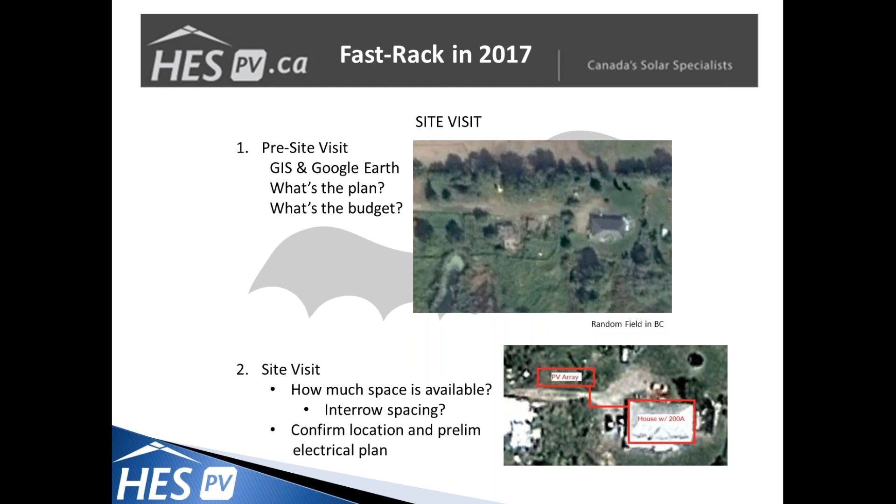So after the site visit is completed and you and your customer have agreed on the size of the system you're looking for, next is our online component generator. This is actually something that Cameron, the marketing department, and myself have been working on, which is designed to make it quicker for you guys to get quotes together for the materials that you need without spending exorbitant amounts on extra components.

Some of you have been around for a while installing our old 2-tier ground mount 8s. If you ever needed to install 12 modules, you ended up buying two 8s and wasting a whole bunch of material. So what we did is we redesigned our whole ground mount system to be a modular collection of leg kits and rail kits that have different configurations depending on how many modules you're looking at.

For this webinar, I just put together a mythical 20 module layout into our ground mount generating tool. The website, as you see, is at the top. We can send that out after this webinar for everyone to take a look at. Once you've filled in the basic information, selected the module that you're going to be using, hit the continue button, and you get a really nice, simple output screen.

From this, you've got the module you've selected and the number of modules that you input, and then what generates from this is the number of leg kits and the number of rail kits that you're going to need to purchase to build this mount. In addition to that, it also gives you an indicator of how many penetrations you're going to be using, and that's going to be your points of contact with either your ground, your foundation, your piers, helical piles, whatever it is that you're mounting to. That's the number of points you're going to be contacting to the ground. We're going to get into that a little bit later on when we talk about foundations.

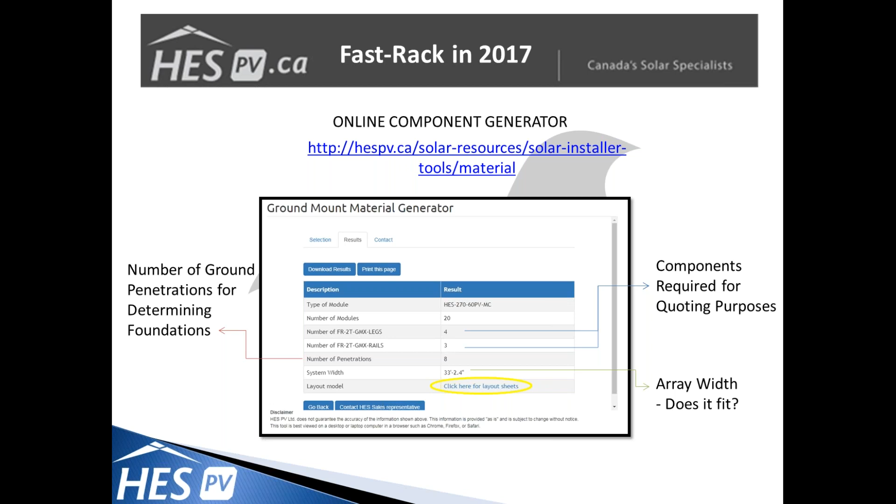Now, one of the last things, and this is something that we've put together for most of your two-tier ground mount layouts for anything under 30 modules. We've put them online, made them available to you simply by clicking "click here for the layout sheets." You're going to get a 3 or 4 page document, which is going to have both a 72 cell and a 60 cell module layout. Pardon me.

With these, sheet 1 and sheet 2 of the document show you the overall width of the array, where your feet are going to be placed east to west, and also the distance between the front feet and the back feet of your ground mount. You'll notice we've planned for a 10-foot on-center spacing for all of our rows. Again, that makes your life easier when you're putting either your piers in or your concrete foundations. Always going to be multiples of 10. And that 7'6" distance between the front leg and back leg is the same between both the 60 and 72 cell module layouts. So a simple, easy to use foundation guide or layout design.

I mentioned on the previous slide that for under 30 module layouts, we have most of those available online. We also have some of the layouts that people have asked for. I think we've got a 36, a 40, 42, that kind of idea. And as you, the installers, come across projects and you need layouts, when you ask your sales rep for those, we're going to put them together as a package similar to what you see here, and we're going to put them into the generator so that they're available for future use as well.

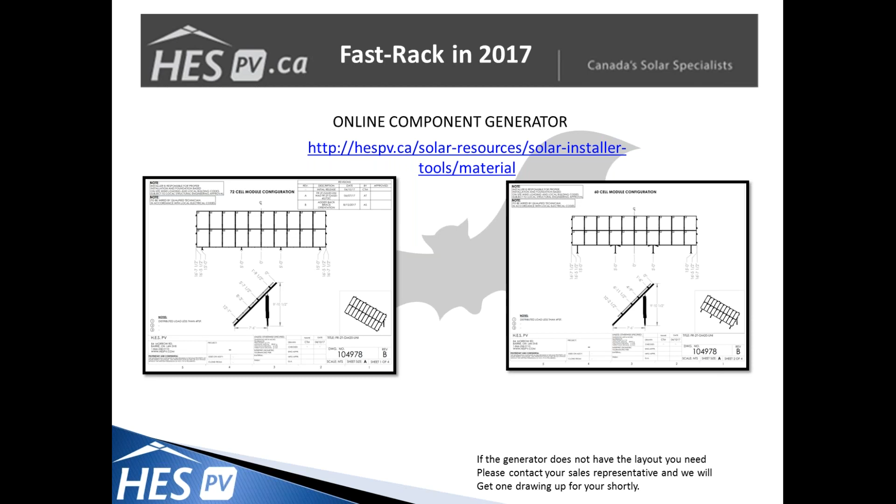The last page of these documents, as you see here, is the back brace orientation. This is simply to help you figure out how the back braces are going to be located on your install. It's not always going to be an X in between each set of legs. It's going to be this chevron type pattern with either an X in the middle or just a continued chevron, depending on if it's an even or odd number of legs.

You'll also notice on this diagram there is detail A in the bottom center, and that is the location for the L feet which hold the cross braces based on the height on the back legs. As you see, it's from the top of the back leg to the top of the L foot. Just a nice simple measurement so that you can pre-build these on site and speed up your install time.

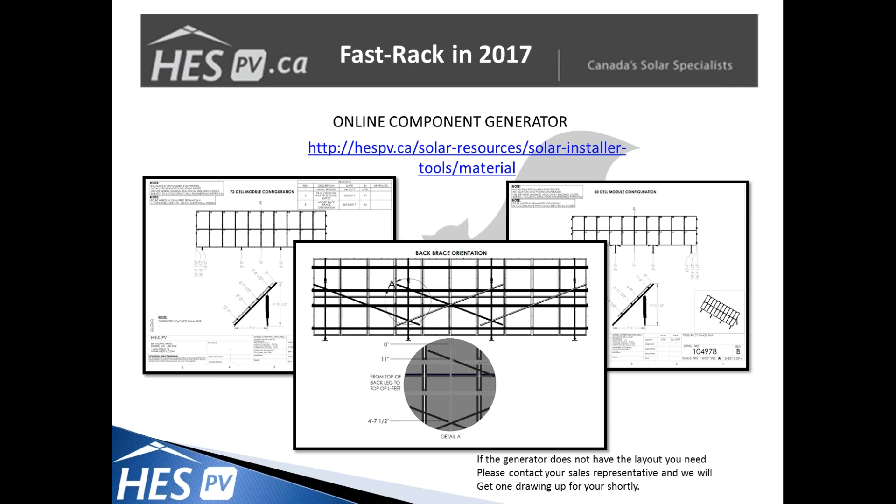On that, I'm going to go forward, and let's talk a little bit about the components that come with your ground mount leg and rail kits. So the rails, I apologize for this image, but in there are actually the end clamps, the mid clamps, and your grounding lugs, as well as your 13-foot HD rails. Every time you order a quantity of one of the FR-GMX rail kits, that's what you're going to get: your 4 rails, your 8 end clamps, 16 mids, and 4 splice kits.

You'll notice that that's 4 extra mids and 4 splice kits that you may not need if you're only installing 4 modules. But if your system does go beyond a total of 8 modules, if you look at 10, 20, and onwards, you're going to want those splices, and of course you're going to be replacing a set of your ends with mid clamps.

So modular design, you can keep growing as your system requires. The other part of this is the FR-GMX Leg Kit. So this includes, of course, the front leg, the back leg, the feet. That's going to be the feet that interface between whatever your foundation is and the legs. As well, you're going to get your pivot plates and all the necessary fasteners to put this together.

In addition to that, you will also get a 13-foot UL rail, which is the cross brace that we were showing in detail on the previous slide, which is used to help resist any side loading that may happen to the array. With that, that's the foundation. That's the key to the Fast-Rack 2-tier ground mount system. And so let's now go into what we need to do for an install.

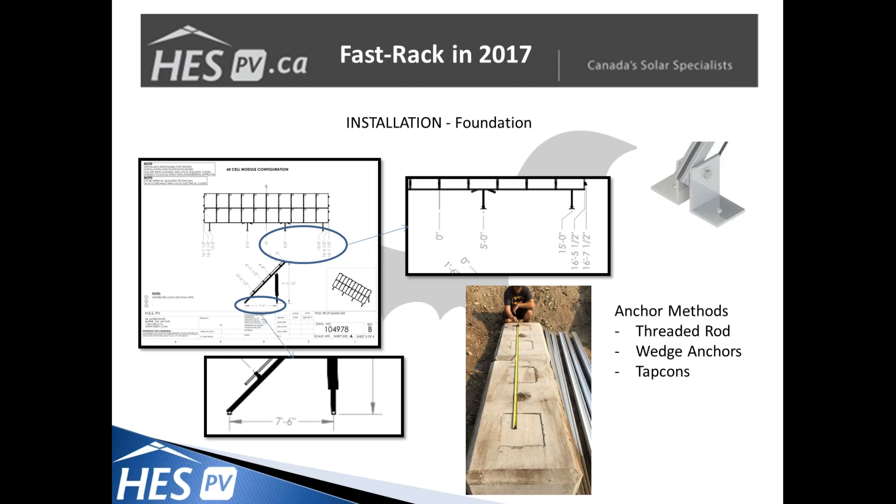All right, continuing on. Once you've got the blocks placed, you've got your feet located and secured down to the blocks, it's time to actually start getting the rest of the mount put together. Now, one of the things that we've talked about before amongst the staff at HES and on different webinars is that prep beforehand is going to save you just tons of time.

Quickly looking at it, on a flush roof system, every minute of time spent on the ground prepping, building installs, or sub-assemblies, it can save you up to 5 minutes on a roof. That's a pretty generous number, but you are saving monstrous times working on the ground. This happens with the ground mounts. If you can do any pre-assembly ahead of time, you're not spending so much time up on a ladder. You're saving time. You're not repositioning your workstation as you go.

So with that, this is where you can save a bunch of time on your install, which is pre-assembling your legs. With the layout package provided from the generator, we've provided values for locating your L feet for your panel rails based on the top of the front leg. Nice, simple, easy to hit marks. This is for a 60 cell layout. A 72 cell has slightly different dimensions, obviously due to the larger module.

But this makes your life easy, having your L feet pre-installed before the legs are raised. In addition to this, locating your pivot plate based on the tilt angle that you want. That's a nice and quick and easy one, and attaching the back leg. So you're actually just installing an A-frame. We found that using this method, as much pre-assembly before we get these up in the air as possible, made our demo install actually quite quick and quite easy.

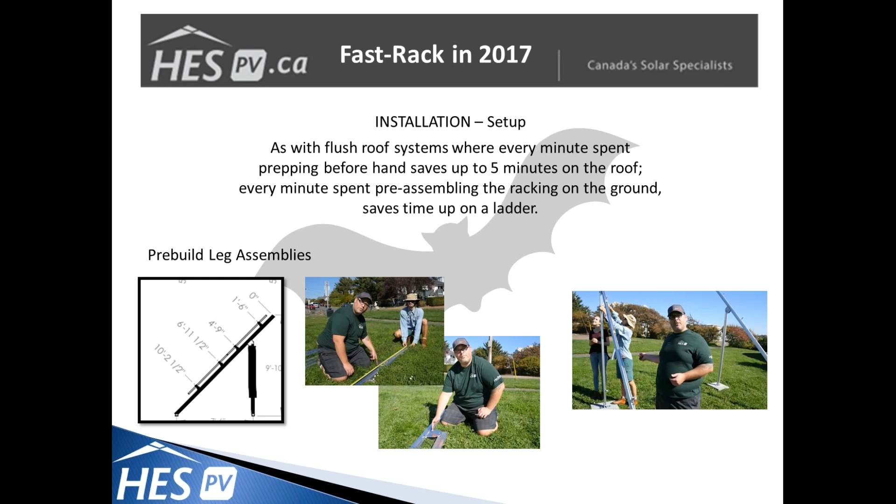Onwards, the cross braces. I mentioned before that each of the leg kits comes with a 13-foot UL rail, which is used for lateral support on the array. As you see here, we've got 2 sets of legs, we've got 2 cross rails. Because this demonstration block that we're building was only designed to hold 8 modules, that's why we've got the cross, as opposed to the chevron pattern mentioned earlier.

With that, one thing to keep in mind is you want to keep your legs parallel. You want to make sure that nothing has shifted, there's no lateral movement on your legs. So when you're putting in your cross braces, this is a good time. Just measure the distance between the bottom of your front legs and the top. And those numbers should be the same distance.

Anybody who's got a bit of a carpentry background is also going to probably measure from corner to corner. That's a nice way to make sure that everything's nice and square. It's a little bit harder once the legs are up in the air, but something to consider. All right.

Mentioned before, the detail A on the last page of the layout diagrams has the height that we want to locate the L feet, which are going to hold those cross braces. Again, from the top of the back leg down, nice easy marks to hit, and really reachable from ground level.

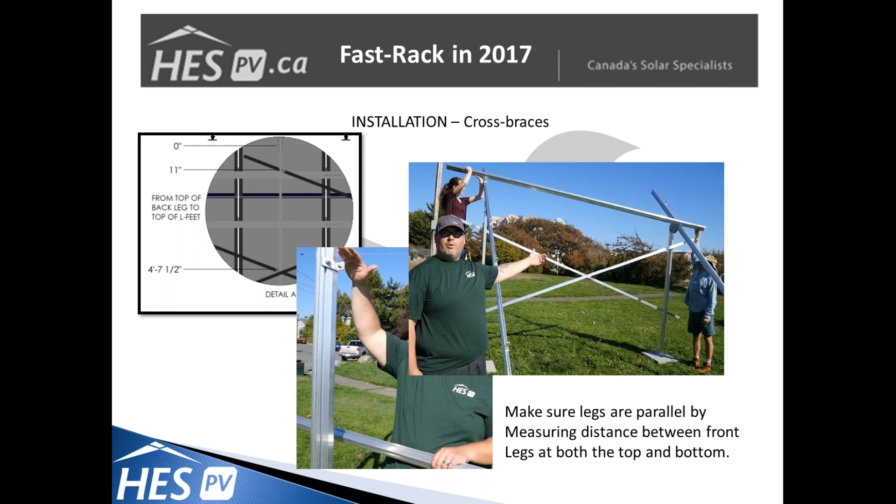Continuing on. So once we've got the cross braces installed, it's time to look at putting in the panel rails. Sorry, I'm going to jump back a slide here, but with putting in the panel rails, since we've done the prep work beforehand of installing the L feet on the front legs while they were on the ground, installing the panel rails is quick and easy. Simply locate the rails in place, tighten them down, and of course make sure that they're centered or located based on the layout of your system.

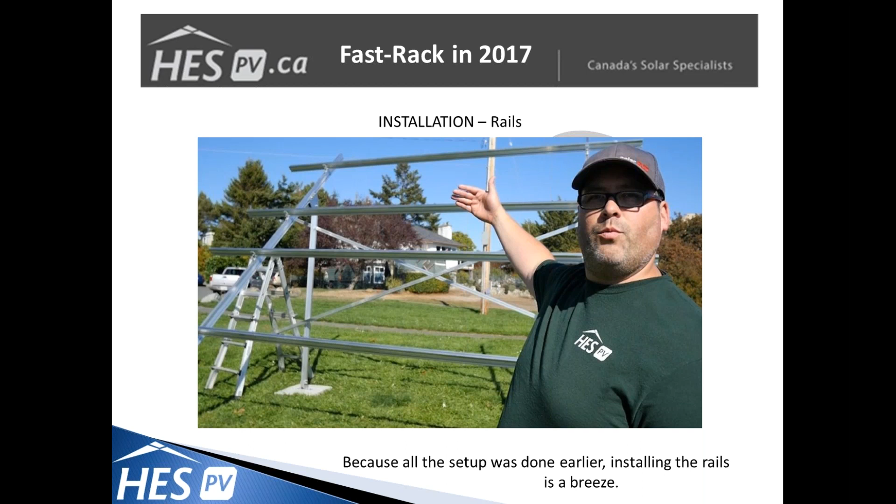The next one, same as any of your flush roof installs, which we're all probably quite familiar with. Now that we've got panel rails in place, it's the same as a rooftop install. It's time to look at installing your end clamps, your mid clamps, marking the center of your array so that everything's balanced, putting in your optimizers and your microinverters, and of course starting to work on your wire routing.

Good part of ground mount over your flush roof is you can actually work underneath to tidy up some loose ends if need be, but of course we'd prefer to address those before we get too far along on any install. As you can see, the image on the top left here, Ariana, one of our students this term, and I are marking the center of the rails, so we know where the first set of mid clamps are going to go, and we've decided to build out from there to again make sure that our array is centered and can proceed evenly and quickly.

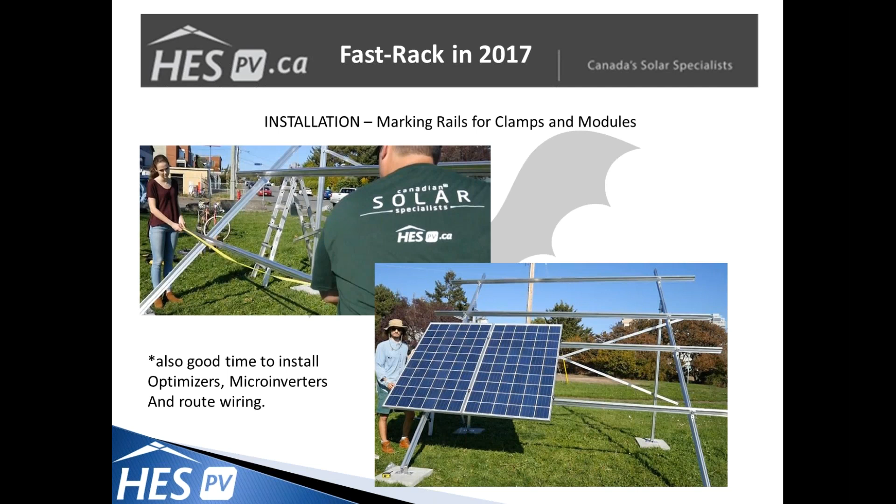With that, once you've got the first modules in, of course, there's going to be some ladder work getting the top rows in place, but it does go by quite quickly and easily. One thing we have noticed, similar to your flush roof installs, is providing a little bit of a gap between the upper row of modules and the lower row, and trying to keep that even.

It's an old trick, but I think a lot of people use it and love it, which is just simply putting 2 mid clamps between the upper row of modules and the lower row to help provide a uniform spacing across, and then just knock those clamps out as you go along. It's kind of a nice little trick if you're not using it. Helps make the array nice and easy to level.

All right, I realize I've gone pretty quickly through this, so what I'm going to do is we're just going to quickly show you. Oh, that didn't work. Oh, hold on, let's see if I can get this video to work for us here. Pardon me for a moment. Slowly starting up.

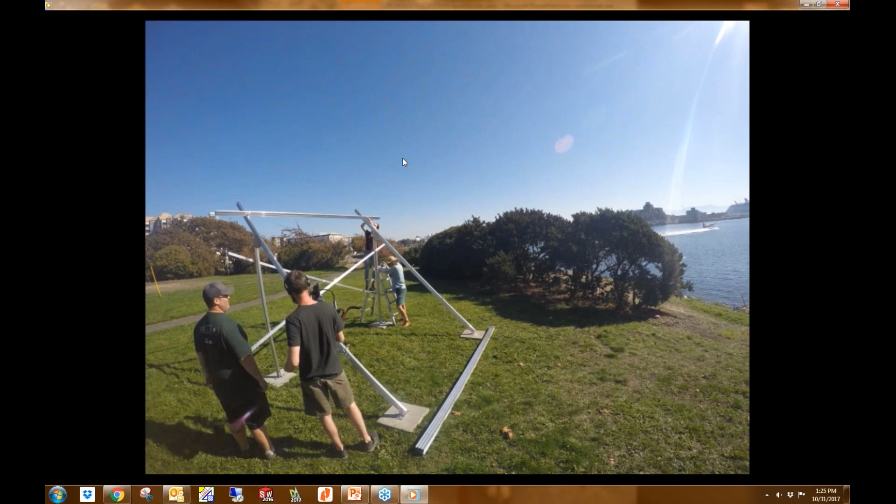So it is a time-lapse, which was a little quicker than most people wanted, but a good indicator. We're showing a little bit of ground preparation work happening, and there we go. Legs go up nice and simple, cross braces, and of course the panel rails followed by your panels. There you go, 2 kilowatts, under 30 seconds, nice and easy. I think everybody can hit that mark without any problems.

Bear with me for a moment here. I'm just going to get back into the webinar here. Or not. Okay, while this is catching up with us, there we go.

Yeah, obviously there's quite a learning curve with getting these going. The first systems always take a little bit longer than normal, but we now have installers out there that are, in a day, going from bare ground to a 5K install done quickly and easily. Of course, depending on crew size and experience.

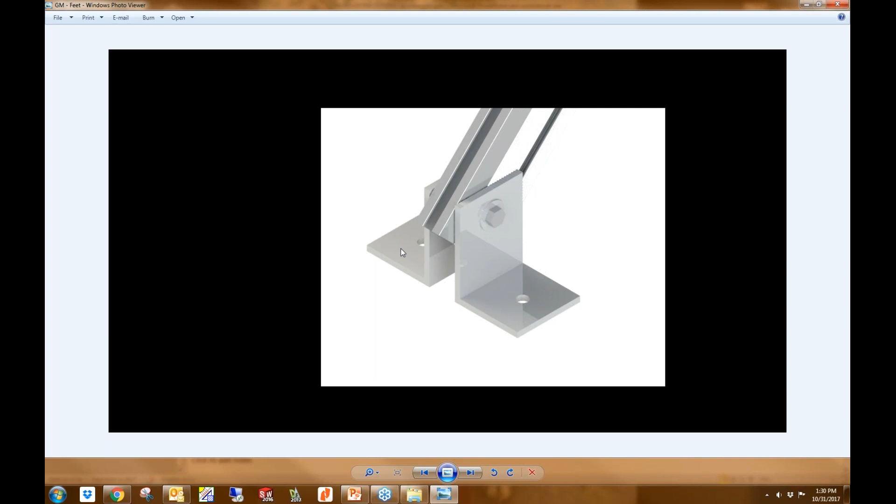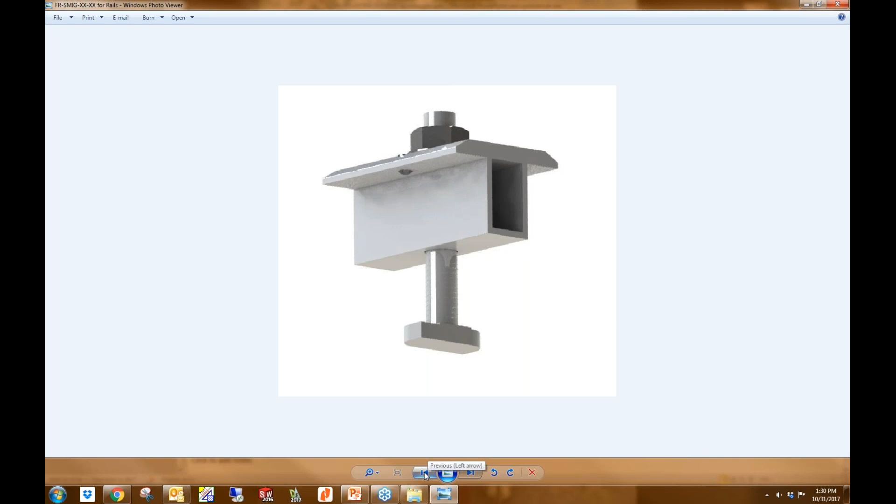The pivot plate. These are all M8 T-bolts designed to fit into the slot in our HD rail, and of course a pivot, a single 2-inch by 1/2-inch bolt which goes right through our HD rail back legs to give you a point to pivot about.

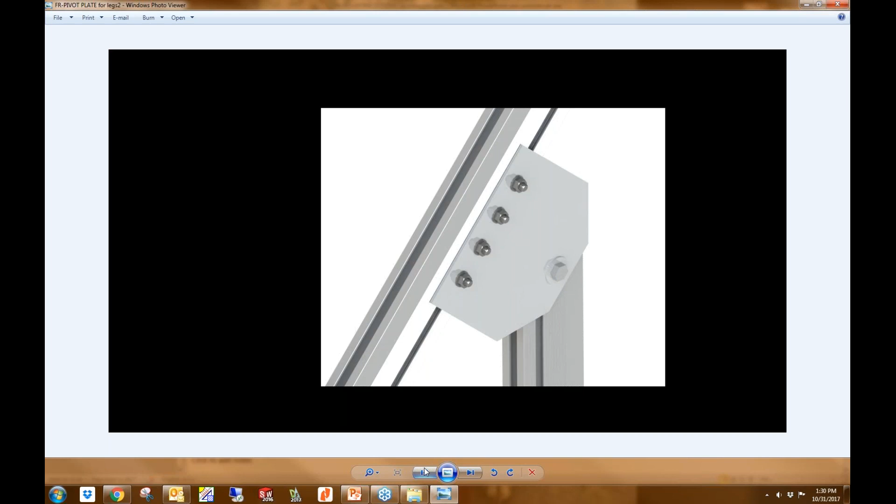Excellent, thank you. And we still have a few more questions coming in here, folks, so we'll get to each of them as we go. The next question is in regards to sloped installations, say on the side of a fairly steep hill. Which foundation type have you found to be most effective?

On those ones, we've found definitely either the concrete piers or the helical piles, depending, of course, on what you're anchoring into, what your soil conditions are like. They give you the versatility to make a level starting point. So longer piers on the downslope, shorter piers on the upslope to get a flat level ground to work with. Same idea with screw pile: you can just leave it longer at the front, shorter in the back, and that gives you an artificial level ground to start with.

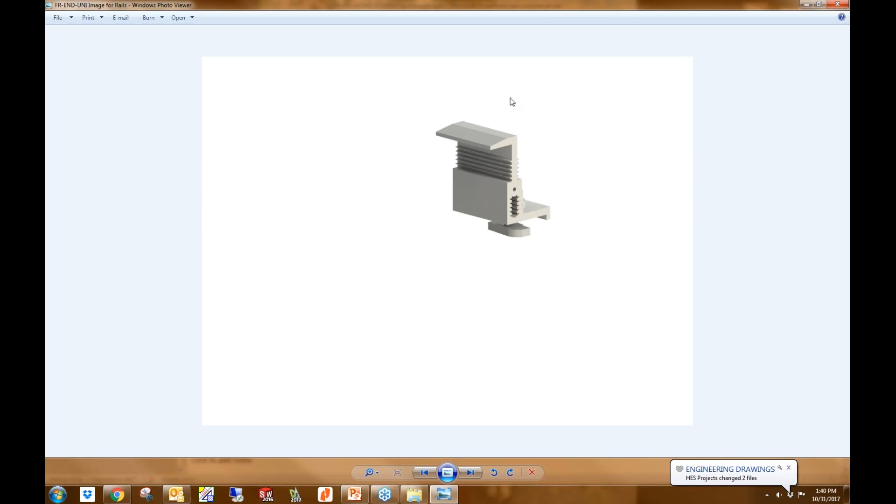And the final question is also about leveling. Is there any adjustment on the legs for leveling purposes? On that, I'm just going to jump back here to the image. Sorry, bear with me for a moment. Almost there. The legs themselves have no height adjustment. So if your precast concrete blocks are not on perfectly level ground, you will have to create your own height offset, either using threaded rod or wedge anchors that have an exposed thread that allows you to adjust the height that way.

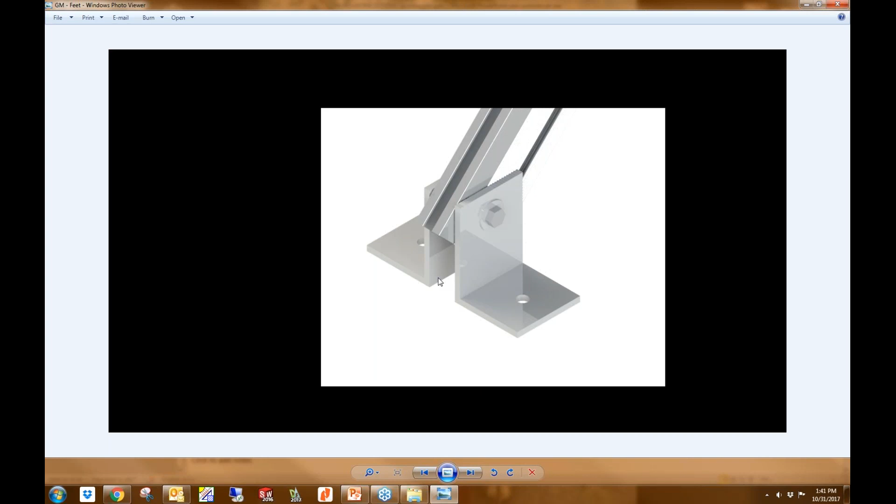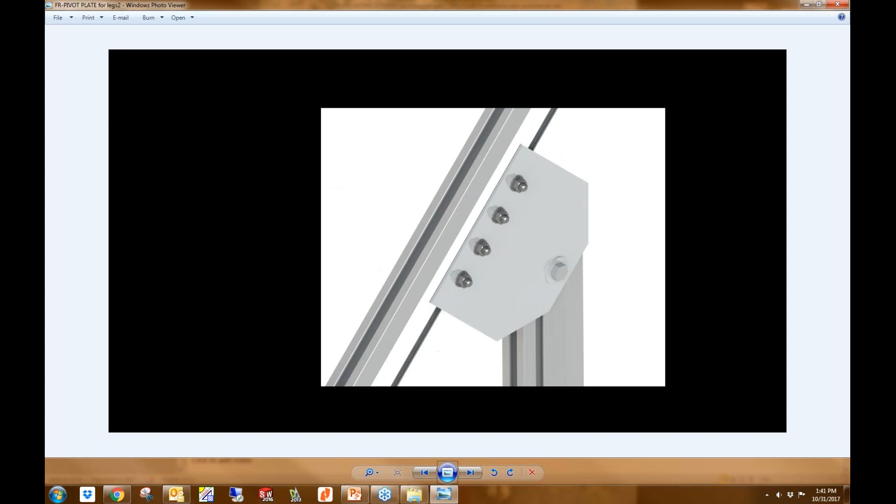With that, if there is a small discrepancy between the height of the feet or your foundation, with our L feet being the connection point between the front leg and the panel rails, they do have about an inch and a half of vertical adjustment for leveling, the same leveling that you do on your flush roof installs. So the feet attaching to the ground don't have built-in height adjustment, but the entire system can adjust the panel rail height.